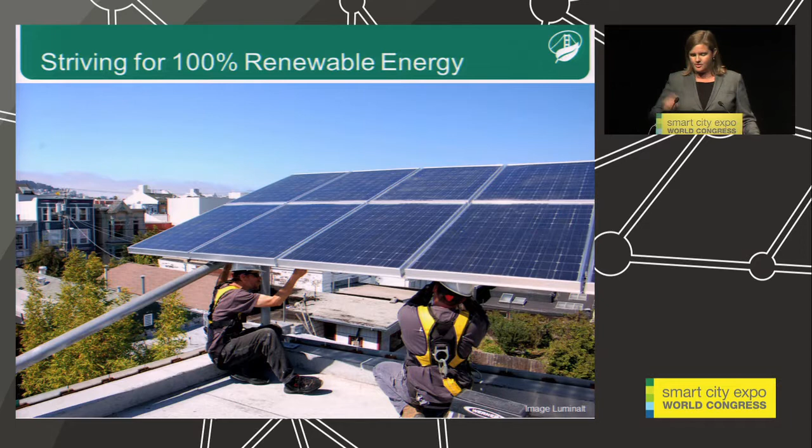And as you all know, inefficient buildings waste energy, and that's why we have a robust green buildings program.

This green building program has done two things. Back in 1999, we passed one of the first green building policies in the country, requiring LEED Silver certification for all municipal projects as of 2004, and requiring LEED Gold certification for all municipal projects in 2011. For those not from the United States, LEED certification is our version of setting standards and certification for buildings that have gone above and beyond for energy efficiency, water conservation, and renewable energy. We now have 63 municipal projects in San Francisco that have achieved LEED certification or are currently pursuing it.

A second policy is called the Existing Commercial Building Ordinance, and it requires that all commercial buildings 10,000 square feet or larger report their energy use data to the city. The idea is that transparency in sharing that data will help inspire property managers and property owners to take action when they can see what measures they could take to reduce their energy use as well as save money on their energy bill.

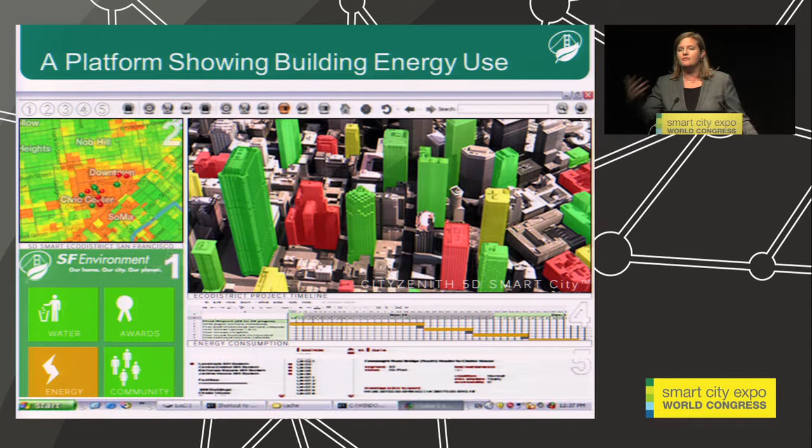We just yesterday announced a partnership with CityZenith, who is going to help us turn all of this data that we're collecting into something useful to the public. This is an initial mock-up of what we could do with 5D technology, showing which buildings are energy hogs and which are energy savers. This is a tool that we hope both property managers and the public will use to continue to drive retrofits in the commercial building sector.

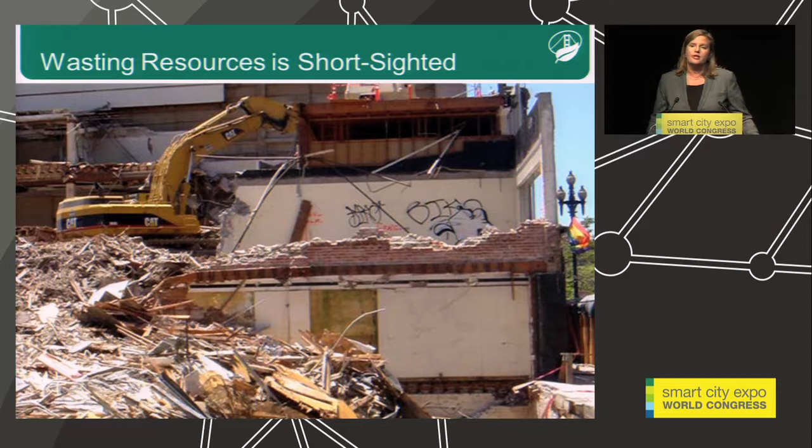Speaking of green building, we know that wasting resources is short-sighted, and that's why we also have a construction and demolition ordinance that requires 65% or more of our construction demolition waste to be diverted from the landfill. We've expanded that idea of not wasting resources to our garbage collection program, setting a goal to achieve zero waste by 2020.

The good news is San Francisco is diverting 80% of our waste from the landfill, and we don't incinerate any of it—that's all through recycling and composting. This program, we like to say, is a leader in the US in showing how you can have an easy-to-use program, financial incentives, and outreach and education to help divert waste from the landfill.

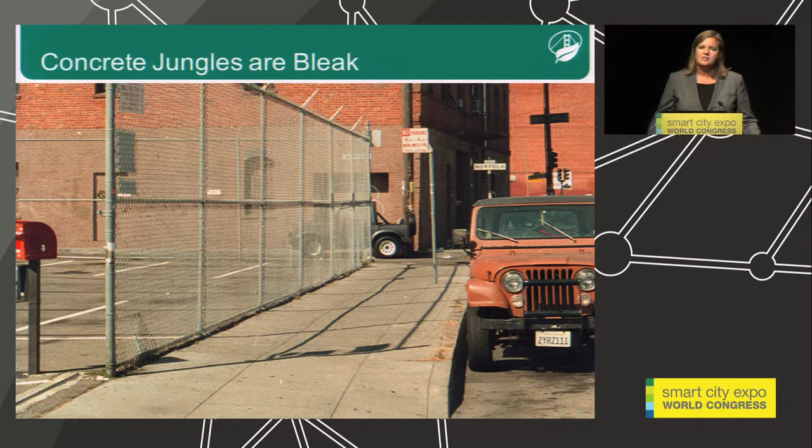Speaking of our zero waste program, we also want to make sure that although those waste programs are helping keep litter off the streets, we obviously don't want concrete jungles—we want to focus on livability. So we have an urban forest program focused on ensuring that all of the trees planted in San Francisco, on both public and private property, give us multiple benefits, whether it's cleaning our air, helping to sequester carbon, or providing habitat for local wildlife.

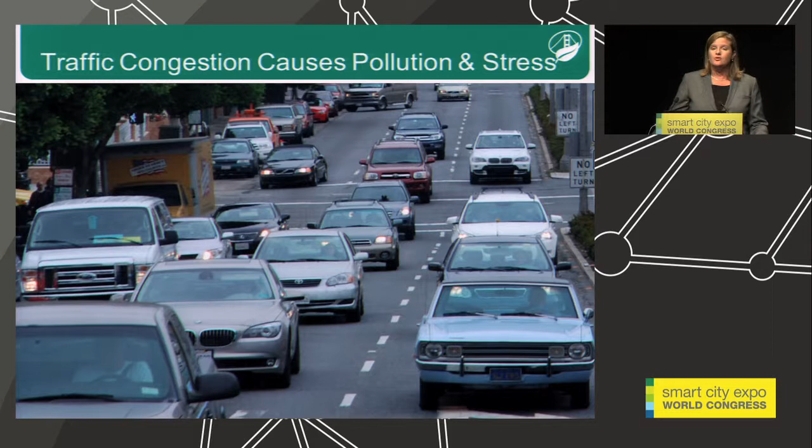Like many cities, when thinking about livability, we want to reduce traffic. San Francisco is the second densest city after New York in the US, so we do see a lot of traffic. How are we combating that? We are a transit-first city, meaning we prioritize investments in our public transit system, as well as in supporting biking and walking as alternative modes of transportation.

On the public transportation front, we have about 300 electric-powered trolley buses. This is significant from an environmental perspective because all of our municipal power comes from our Hetch Hetchy Dam, which is hydroelectric power, so it's greenhouse gas emissions free. All of the buses that run on fuel are powered by biofuels, anywhere from B5 to B20.

Also, like many cities in Europe, we have a bike boom going on in San Francisco. Bike ridership is up 40% over the past 5 years, because of investments we've made in expanding our bike lanes and infrastructure. We now have 250 miles of bike lane infrastructure within the 49 square miles of San Francisco, which has really helped increase biking in our city.

Although we focus on transit first, if you do need a single occupancy vehicle, we support electric vehicles, and we're working to become the electric vehicle capital of the US. We've installed about 80 public charging stations at 20 locations on public property, and there are about 200 charging stations throughout the city and county of San Francisco. This charging infrastructure also gives us valuable feedback about how many electric vehicles are using the public stations, and where we'll put future stations.

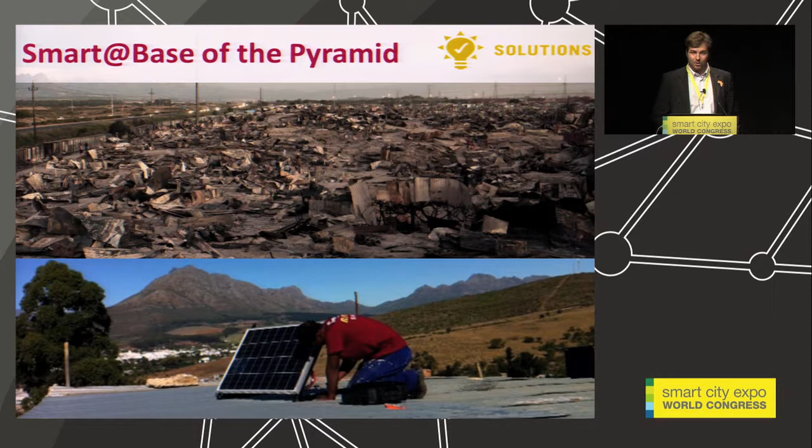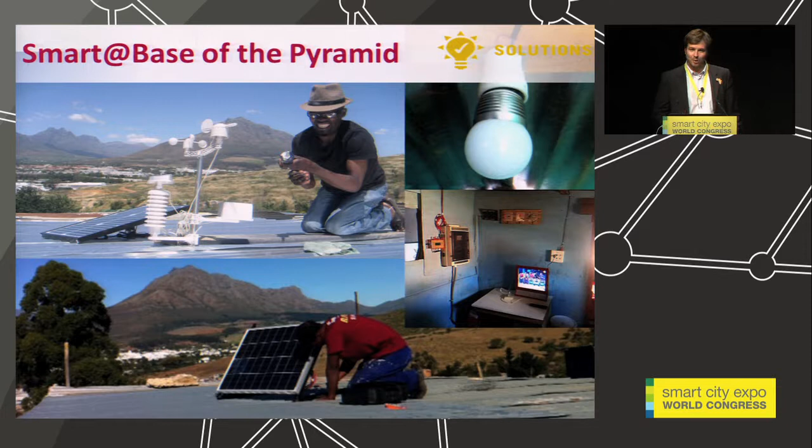So this is a solution we've come up with together with the University of Stellenbosch: fireproof housing, but it's also an off-grid solar home. You're able to buy electricity through your mobile phone. These are different kinds of technologies that really enable people, because they're able to do their homework at night where previously they couldn't, or they could plug in their laptop.

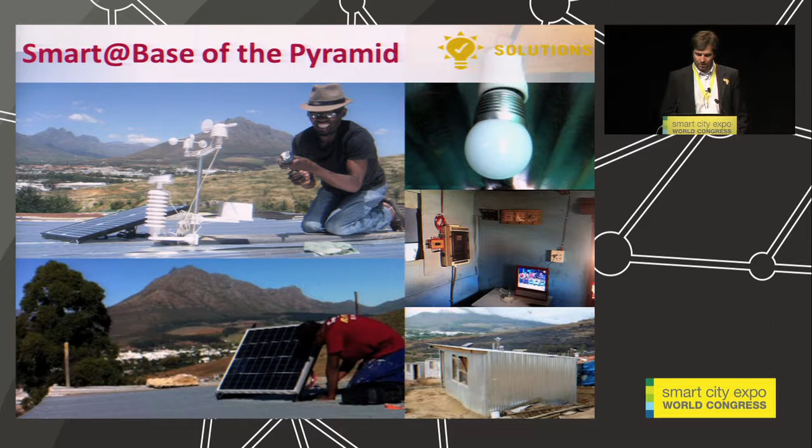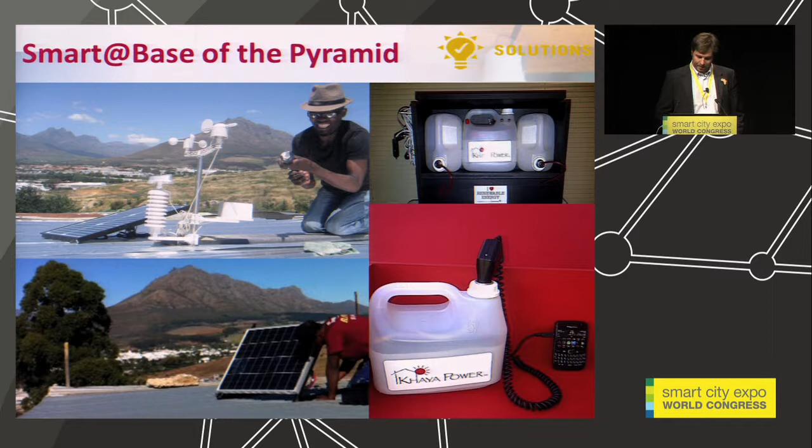And these do-it-yourself shacks, as they're called, are really quite cheap. They range from about $500 to $1,000 depending on how much energy you require. This is another system which slots into this - it's actually a battery that gets charged in the day, and then at night you can take it to your shack and charge your cell phone. So this is how we see technologies arising in the African continent.

But what's really interesting is the business model around it, and that's about social franchising. If we go straight into the communities and tell them what to do, it's really difficult to get uptake. It's more about providing a solution in collaboration, not selling to the community - creating a system where people from the community buy into a business. With social franchising, there's also a learning mechanism where people can learn and become a franchisor themselves.

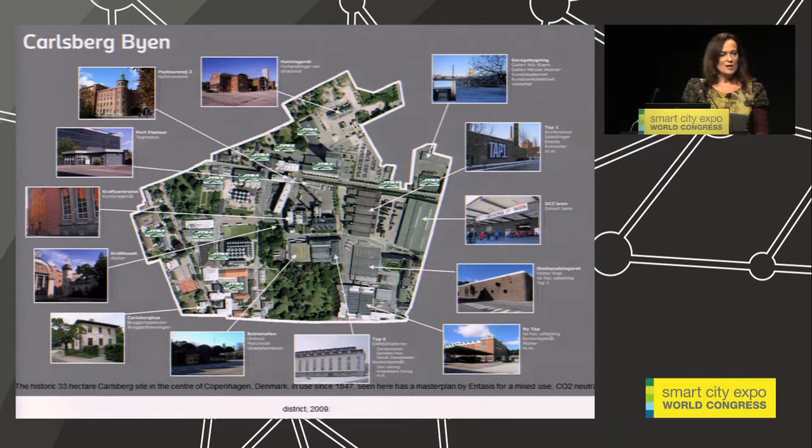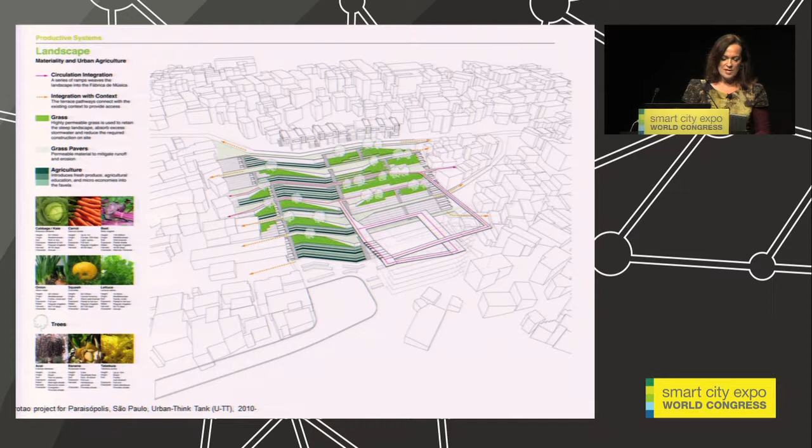So whatever the challenge—going back to that Carlsberg site, which has now been sold by Carlsberg to another buyer, let's hope it gets developed—post-disaster rebuilding, slum retrofitting, there are any number of slums from Dharavi in Mumbai to the different favelas in Rio and Sao Paulo, or reuniting the riverbanks of the city and its people.

The challenge is to create places that are supportive of human beings, not abstract blueprints imposed from above by narrowly conceiving the city as a product without a love for diversity in urban ecosystems and how best they can be harnessed. My book also reflects on modes of achieving resiliency and active citizenship in adaptive planning of urban environments.

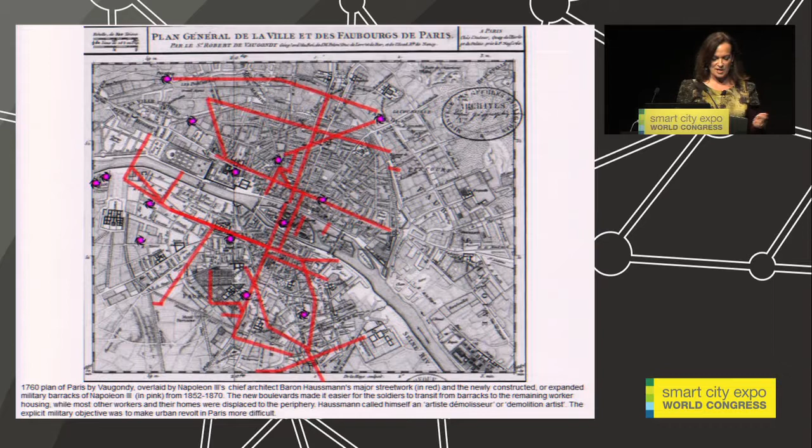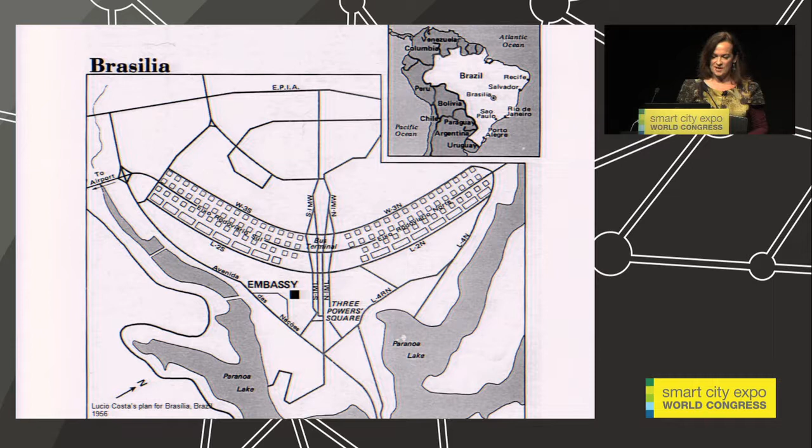So just to give you a blast from the past, how it used to be with urban plans—Corbusier was largely responsible for many in the 20th century that we decided we really didn't find very livable or sustainable. Three very decidedly top-down plans: Baron Haussmann's plan for Napoleon III in the 19th century, Le Corbusier's Plan Voisin of 1925, and Brasilia by Lucio Costa from 1956. Everything in its place and a place for everything, or maybe not.

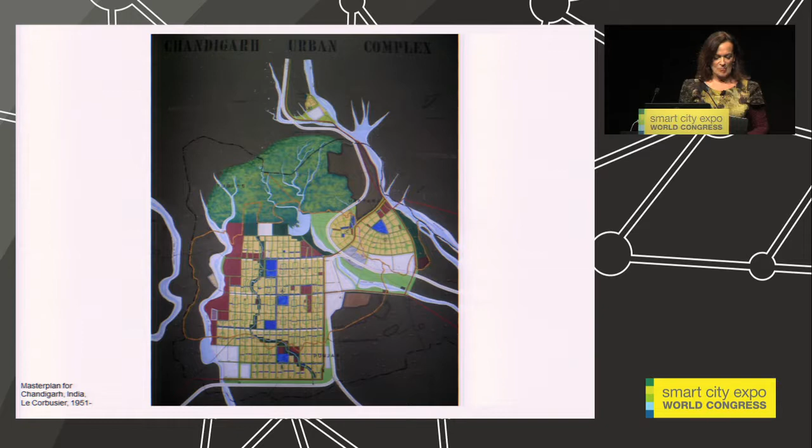Going back into the past again quickly, Corbusier's late modernist city of Chandigarh in the Punjab in India, low density, heavily planted, a beautiful mix of formal buildings and parklands, widely acclaimed and now fast becoming a global hub of IT services. It's got, inevitably, a lot of unplanned as well as planned urbanization and traffic congestion and environmental pollution that affects many cities in the global south as well.

Two academic research teams from TU Berlin and University of Washington's Chandigarh lab recently concluded that the city needed a much better relationship with its peripheral edges and also to the region overall. Washington's lab in particular is studying how the new master plan being forged in response to these pressures can relate growth in a compact way to infrastructural developments, to avoid everything going forward in an ad hoc fashion, which is all too common. Because in the face of urbanization, for livability in a sustainable future, we need to consider city and region in relation to one another much more closely and strategically as parts of a dynamic synergy.

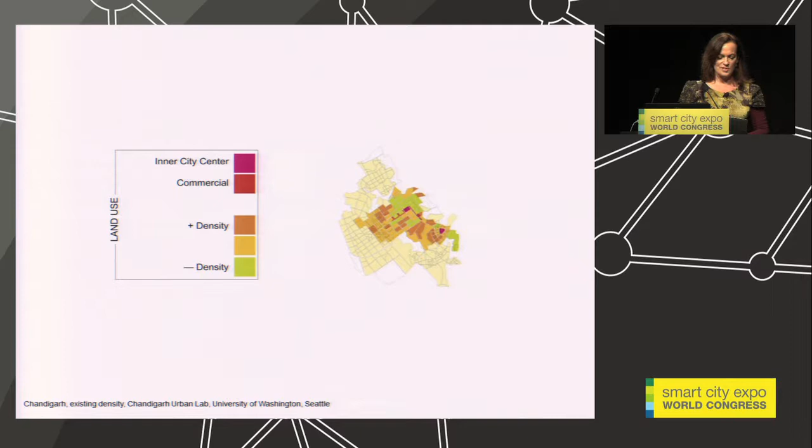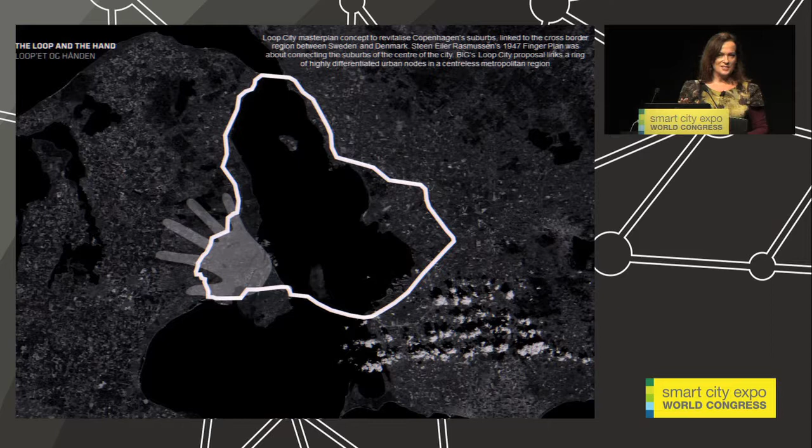Here is BIG's Loop City proposal for Copenhagen. Whereas the earlier Finger Plan of 1947, after the Second World War, designed by the Danish architect Steen Eiler Rasmussen, was about connecting the suburbs with the center of the city, Loop City, by contrast, is a cross-border plan connecting Sweden and Denmark, creating a whole ring of light rail with 11 highly differentiated urban nodes around the Øresund region. Occupying the same space as the entire city, the ring is similar in size to the whole of the San Francisco Bay region and includes work clusters.

The framework plan, if you care to go on the net and check out the beautiful video that BIG has made about it, which is also quite amusing about sustainability, which always makes it worthwhile, covers strategies for energy exchange, waste management, water treatment, electric car stations within the whole bounds of the centerless metropolitan area. All, in my view, offer a very credible plan for a dense, sustainable and recreational development of the whole area.

Now, cities and regions suffer very much from rigid and outdated, anachronistic zoning and planning laws. There's a whole heap of outdated legislation that is holding back a more adaptable use of urban space.

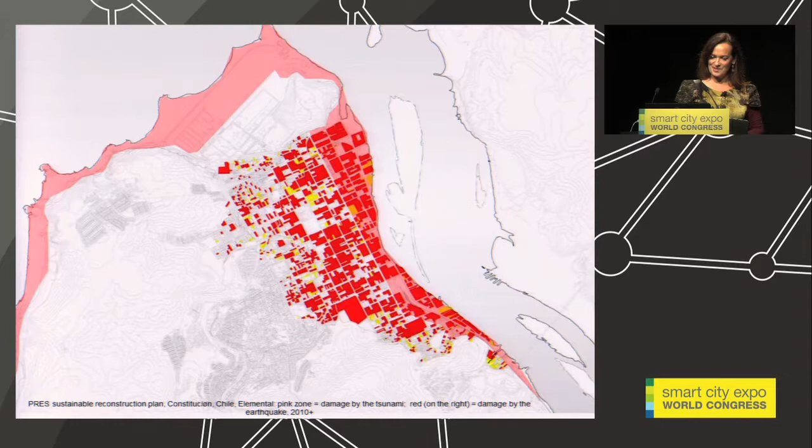The architect Teddy Cruz mainly works on both sides of the San Diego-Tijuana border. Here he creates scalable templates adaptable to changing uses of space. In terms of his method, in terms of proceeding in terms of buildings per acre, he gives priority to the idea of generating economic, social, and cultural transactions per acre, and there is a big difference between the two.

One very key emerging theme is participatory placemaking, which is a force that is now unstoppable, I believe, combined with crowdfunding, which is coming on, increasingly bringing local public space projects to some funding, which can then be built on by other funds.

Working with an NGO, Casa Familiar, he created a series of monthly workshops with the locals, a new type of affordable housing concept for the residents in San Ysidro. In the discussions, he challenged their local conceptions of building density, of community, communal space and financing, leading both them and him to work together and redefine housing as nested scales of interaction on political, economic and social levels.

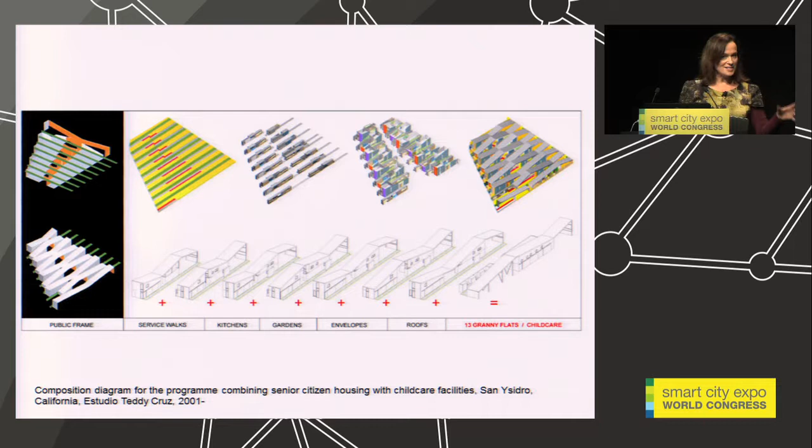The resulting prototype was a hybrid of senior citizen housing and childcare facilities with collective kitchens, gardens and a farmer's market, including co-working spaces and a weekly program of activities devised to make best use of the hybrid spaces throughout the whole course of the day. The plan also included proposals for alternative zoning categories going hand in hand with urban design, dealing with the physical.

So you have the legal and the physical going hand in hand, relating to the city's actual density and citizens' actual income levels. So what you have is fresh research, up-to-date demographics being used. These are key drivers behind some of the best architecturally adaptive plans.

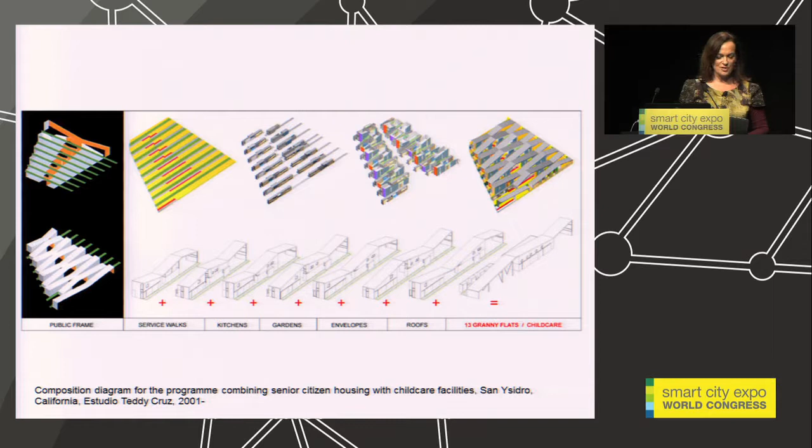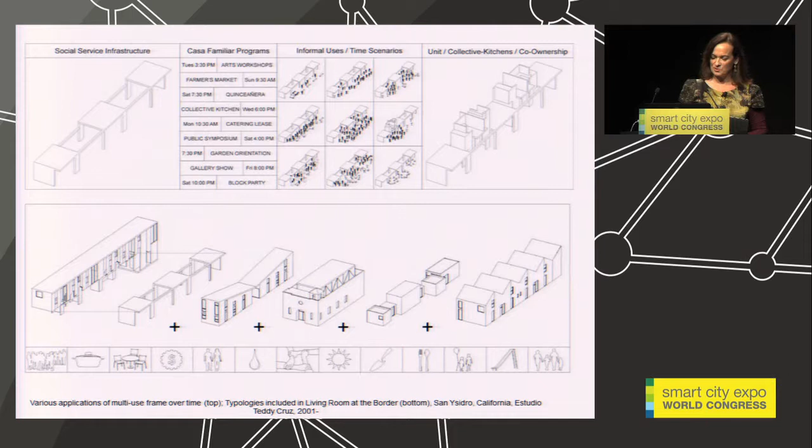Architectural activists are also challenging prevailing standards for building suburbs, which is not a generic category by any means, not just with their words, but with detailed design proposals. Probably what I'll quickly say now will complement what Pieter has said about Stellenbosch from a different perspective.

Michael Hart, an architect and urban planner working in Johannesburg, South Africa, has seen for many years, much to his chagrin, a continuation of car-oriented planning, despite the irony that car ownership is very low, and a neglect of alternative energy solutions in the thinking of urban planning, or let's say the developers, unfortunately. So urban design has been carried out in South Africa for many years, but is not taken very seriously in the restructuring of cities, with extreme exceptions like Pieter's project.

In spite of the influence on the part of architects of thinkers from the United States like David Crane and Kevin Lynch, the challenges of urban sprawl and the realities of dormitory townships with huge residential areas but without mixed use are still very major, well after apartheid has ended.

For his new framework plan, which he provided to developers speculatively and is still in discussion with them, for the new mixed-use greenfield Cosmo City Extension 17 township—a new concept for a township in Johannesburg—Hart actually sat down and devised his own family of criteria, SEEDE: Social, Economic, Environmental, Design and Engineering, to accompany a physical design plan.

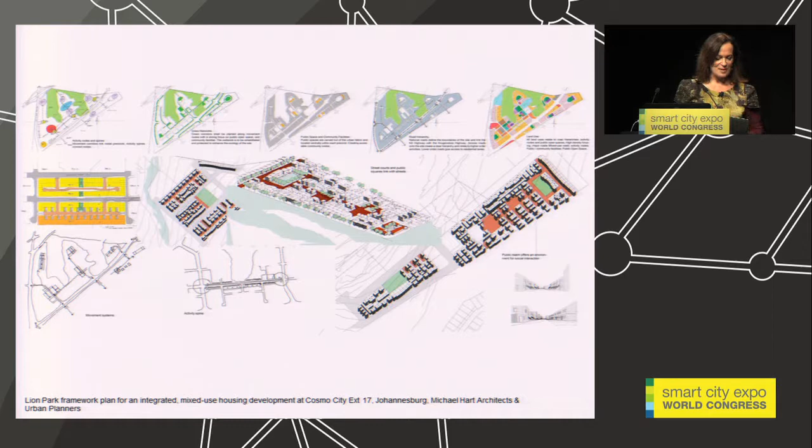It's a design-driven housing development with pedestrian-friendly precincts, mixed-use nodes, encouraging a hybrid work-live environment influenced by the Dutch woonerf concept—woonerf meaning literally living streets—of roads shared with public spaces. This enables secure and safe public social space for children to play, for nighttime gatherings, and any number of different meetings. Centrally placed parks are flanked by social and community buildings and row housing, avoiding a potentially isolating and sprawling tapestry of McMansion-type dwellings.

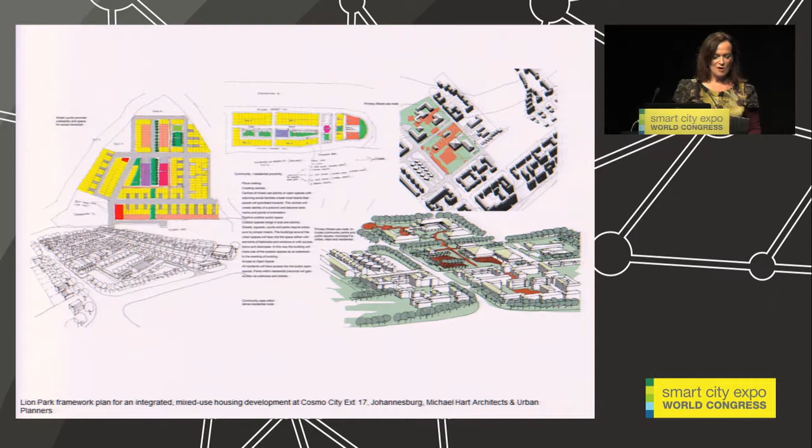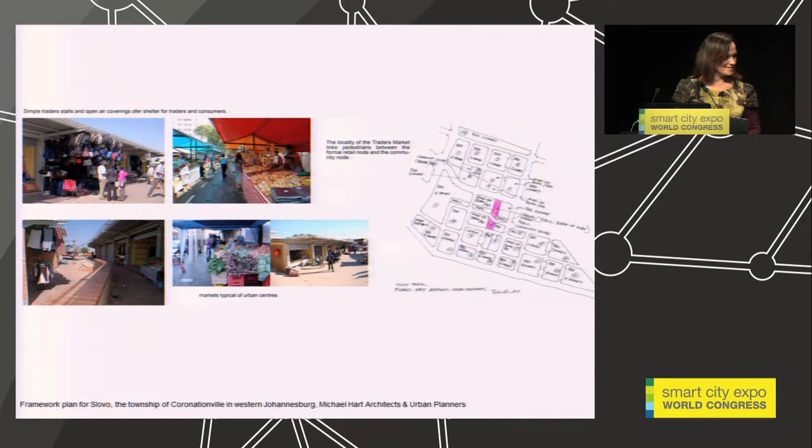Now, I just want to summarize quite quickly because there's more material here, but let me just move on. Just a couple of minutes.

London—I just want to finish off by referring to my home city of London, which has grown in population annually since 1988 and is expected to continue its steady growth for decades. In 2007, there were 7.6 million people, divided between 3 million in inner and central London and 4.56 million in the outer boroughs.

Our city has advanced many transport infrastructure initiatives, including Crossrail, to improve connectivity and reduce travelling times between home and work. But, very briefly, it's not doing nearly enough to create sufficient quantities of new-build housing which is affordable. An emerging model is shared equity, where you buy half of the property or flat and rent the rest, to cater for an existing demographic, let alone future residents.

So I just want to refer to one very imaginative example which came way before the economic crisis. Piercy Conner decided to design a micro-flat pod concept, a prefabricated studio flat with just 30 square meters of floor space and 5 square meters of cupboard space. They gained international media coverage for the whole notion, estimated at only £100,000 to buy—the price of a garage in the West End today.

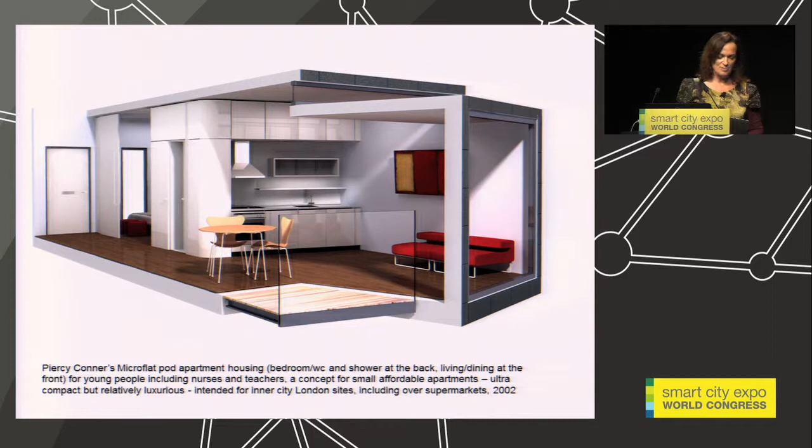Just to summarize, I think that master planning and framework plans, however large or small, can be incredible guiding tools based on principles rather than rigid blueprints. And we need the enlightened systems thinking of progressive architects and engineers aimed at incremental change over the long term, working with alliances across the public and private sector.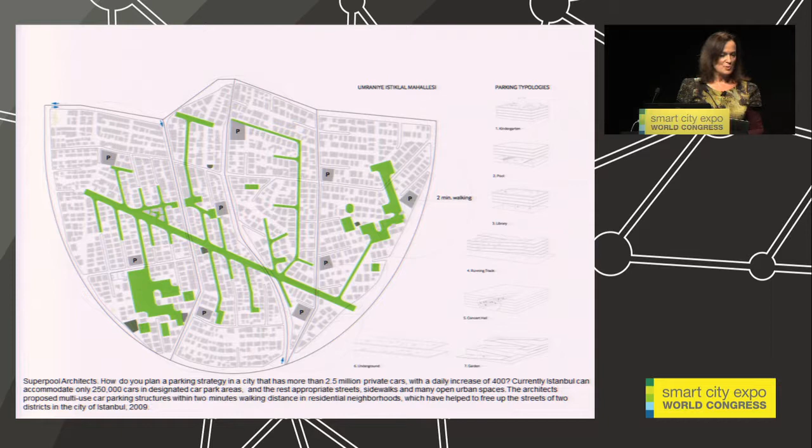We need to ensure that livable sustainability is not just about greenwash propaganda, but actually relates to humanist imperatives. We need to uphold the ideal of the city as a place of rights and meaningful social relations, a place where sanctuary and sanity, communion and eco-friendly living, beneficial in the present and the future, can play their full role.

Thank you very much. I'm sorry to overshoot the time. I'm recovering from a cold, so my health is not 100%, and I apologize.

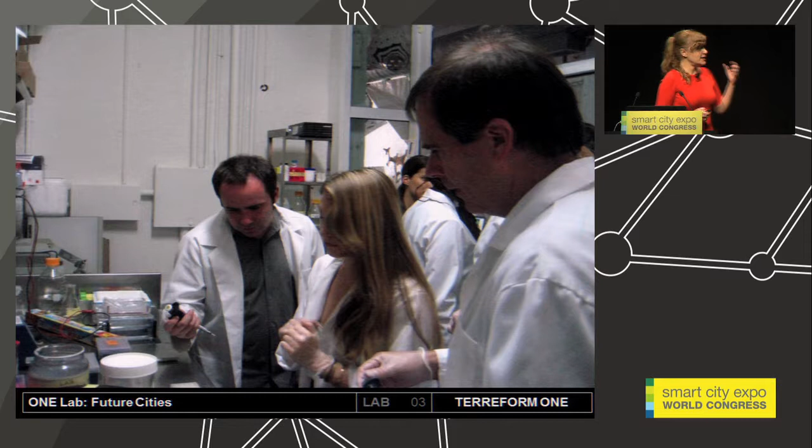Here Dr. Oliver Medvedik teaches the principles of synthetic biology to architects, learning parametric design through shapes, growing mushrooms into building blocks, and finally working with living matter.

Here students are pleaching living trees together into a structural wall and using phytoremediation to purify water. Our students designed this phytoremediation chamber that we are currently installing on roofs and testing with Yale University School of Forestry, to prove that you can filter rainwater using plants and convert it to drinking water.

We had this vision to take the One Lab idea around the world, first in Europe and then globally. I'm proud to announce that today we are starting three schools here in Barcelona, and in Berlin and Prague.

This is in collaboration with the Council on International Educational Exchange, or CIEE, one of the oldest NGOs in the US dedicated to taking students from around the world and sending them to different places. Here in Barcelona, we are partnering with the Institute for Advanced Architecture of Catalonia.

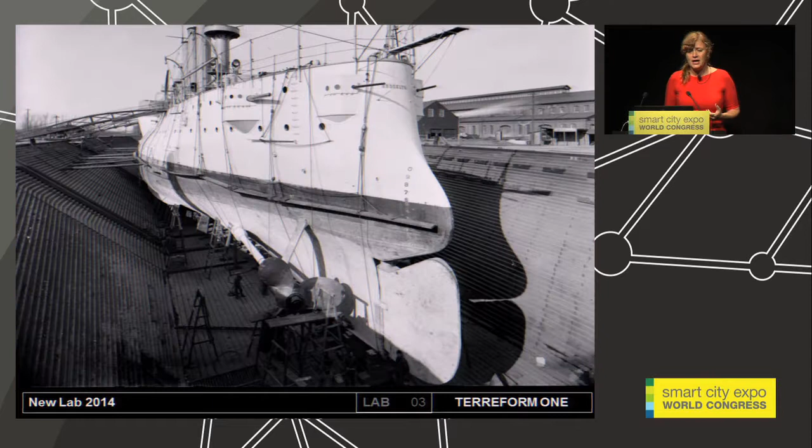Students are arriving this January, as well as in Berlin, Prague, and New York City, where we've just moved our studio to the Brooklyn Navy Yard - 300 acres of industrial space where they used to build big battleships.

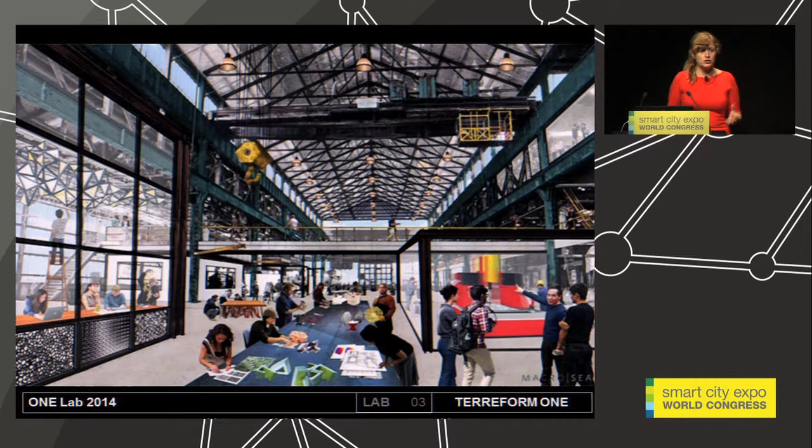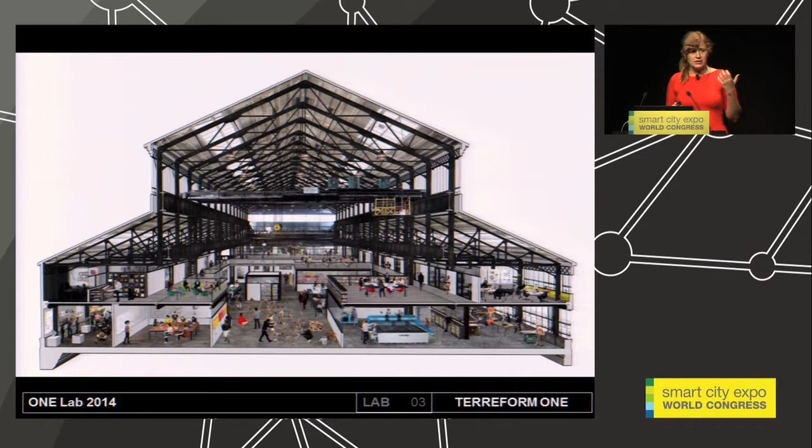We are converting this old factory into a collaborative design and fabrication space where we're going to mix students with entrepreneurs and bring the most advanced technology for both students and designers to test it, to learn, and to know how to design with it. We'll reach out to the community, organize many talks and classes there, and we decided not to wait.

This building is going to open by the end of 2014, so we moved next door into a temporary space called New Lab Beta. This is our new 3D printer, given to us by EOS. This machine can print anything from rubber to carbon fiber, so you can print cranial plates, building materials, building blocks, and machine parts.

We put together this collective of different professionals working in this space together using all this technology. Ecosystems is designing this modular furniture using reclaimed wood. These are kinetic furniture by Jessica Banks. Ed Jacobs is an industrial designer who designed these solar collectors. And here is an experiment to prove that you can bring sunlight underground.

This is part of the development of a new park for New York City called the Low Line. You all heard about the High Line. Now we are converting this abandoned subway station into a park, and this experiment was able to prove that we can support photosynthesis underground.

Marcel Botha, architect, graduate of MIT Media Lab, became a serial entrepreneur. He invented the first ergonomic baby spoon, called Spoonie, designed and manufactured at the Brooklyn Navy Yard. Here it's my partner Joachim and I working on future cities.

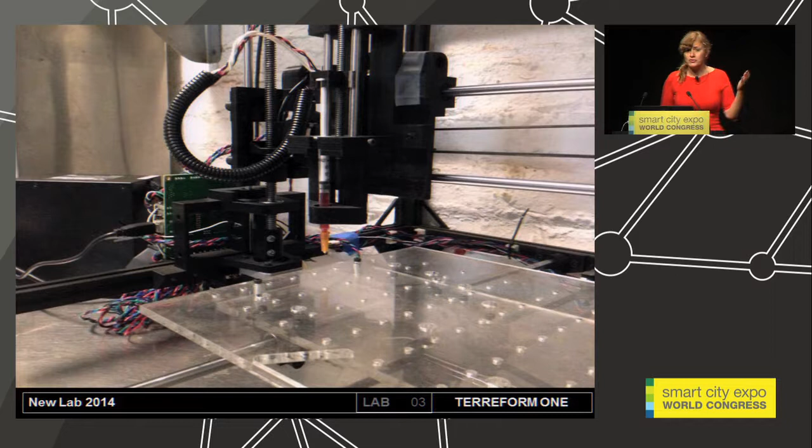And finally, Oliver Medvedik, who built a bio 3D printer, able to 3D print living cells. We hope that in the future we'll be able to grow living watches, let's say.

Why is this important? Because we're bringing all these people together under one roof, since innovation doesn't happen in isolation. It happens when people are together, exchanging ideas, having serendipitous interactions.

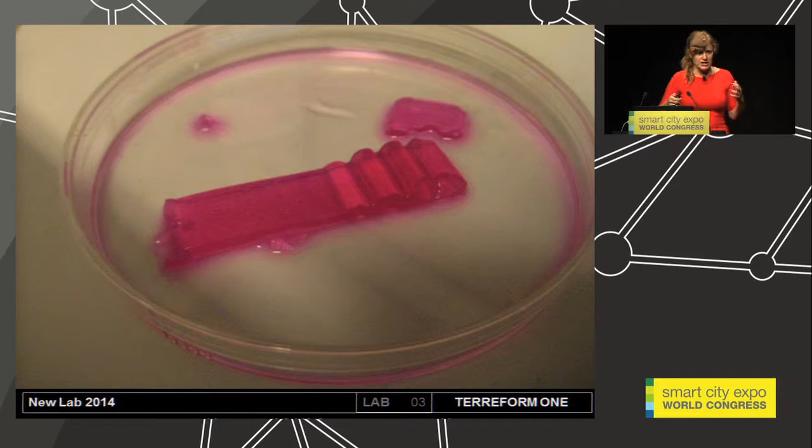So very quickly, I'll show you our most recent research project, where we're looking at the population explosion. You all heard the numbers: the world will reach 11 billion people by the end of this century, and more than three-quarters of us will live in cities. This is an unprecedented condition in human history. So where are these people going to go? Nobody is thinking about the shape and impact these cities are going to have in the future.

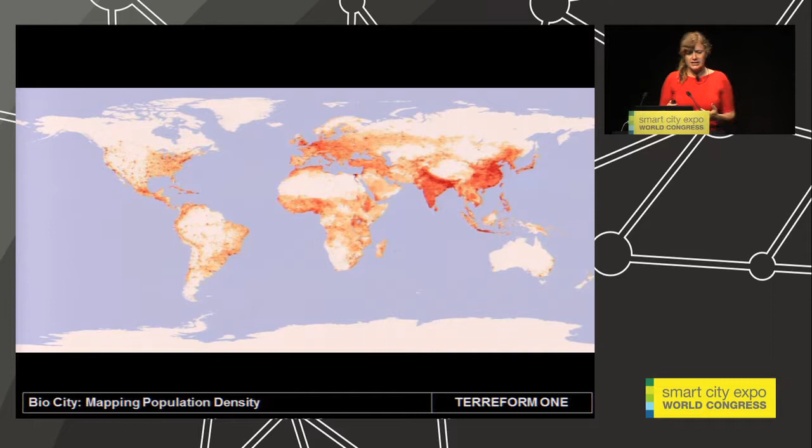So what we did is superimpose the population growth, and we discovered these hotspots where mega cities are going to occur in the future. In addition, Fuller proved that if we can have one energy grid connecting the whole world, we can use the sun and connect the daytime and nighttime hemispheres, supplement it with wind and geothermal, and power the whole world by distributing resources.

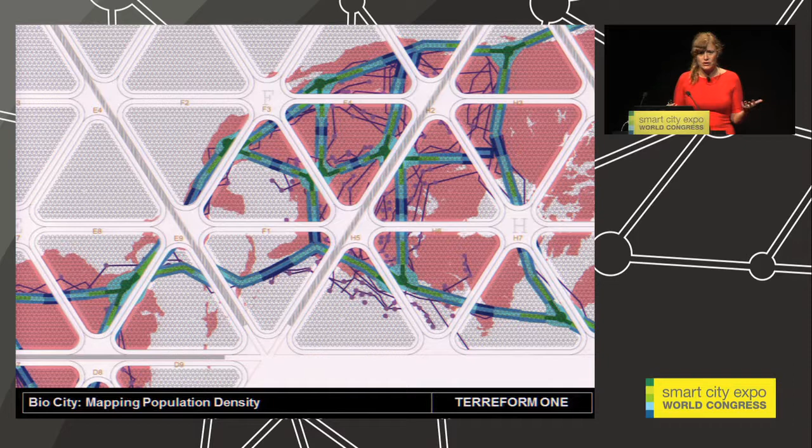Actually, it's currently on display in Rotterdam at the new museum, if you want to see it. So this is one side of the map. On the other side, however, we decided to turn to bacteria, because digital parametric design is based on principles derived from nature.

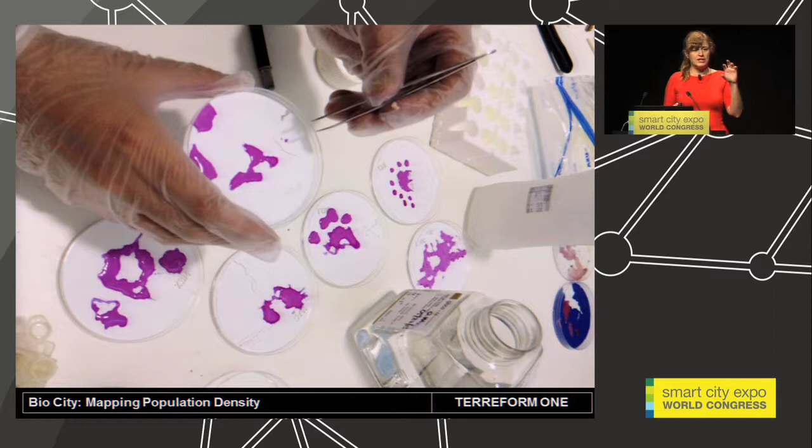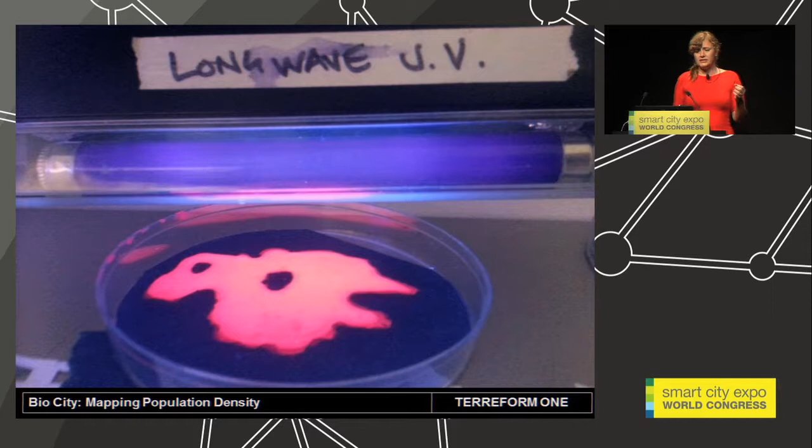So here we are using genetically modified E. coli bacteria, putting it in a petri dish, superimposing and studying the 25 most densely populated parts of the world, and growing this bacteria. It's engineered to express fluorescent light under long wave UV. Here are the 25 areas that we grew in plates.

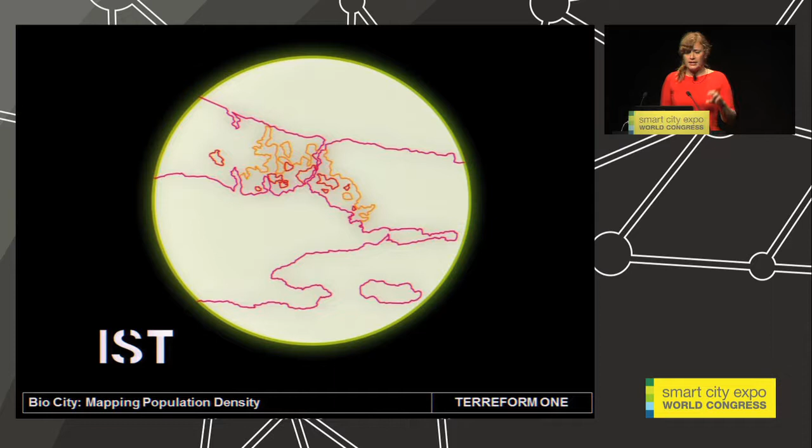Here is just to show you the area of Istanbul, and here is how we now have a bioparametric model, because we're speculating that you can study bacterial growth and predict population growth.

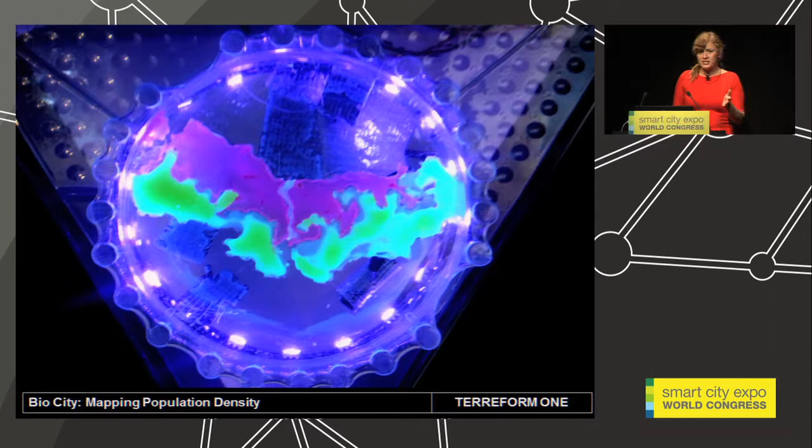So this is the BioCity map suspended in Rotterdam, and we hope that by doing this research we can answer the question: how can we make the world work for 11 billion people without causing environmental damage or disadvantage to anyone?